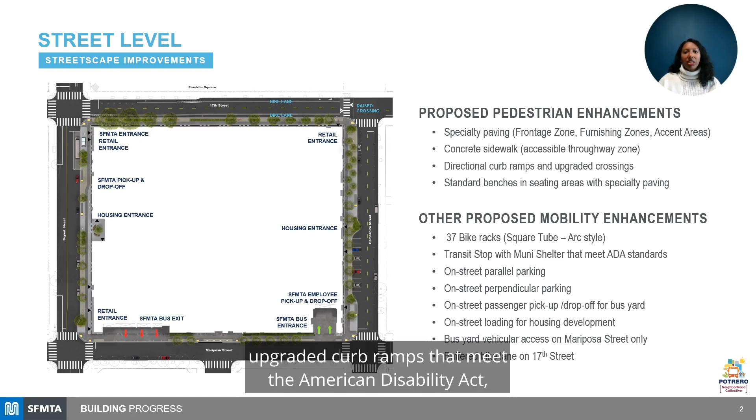To support the reimagined Potrero Yard, the design and construction development team has proposed a number of improvements to enhance both the pedestrian and bicyclist experience. Proposed pedestrian enhancements are designed to create vibrant sidewalks through a mixture of concrete sidewalks and specialty paving, upgraded curb ramps that meet ADA requirements, upgraded crossings, and carefully selected and placed outdoor furniture.

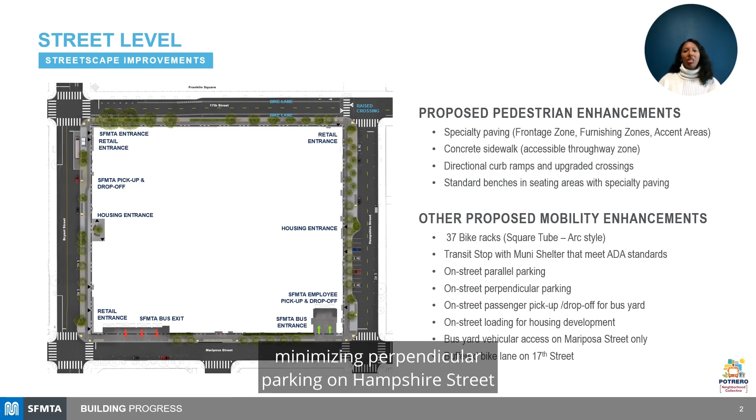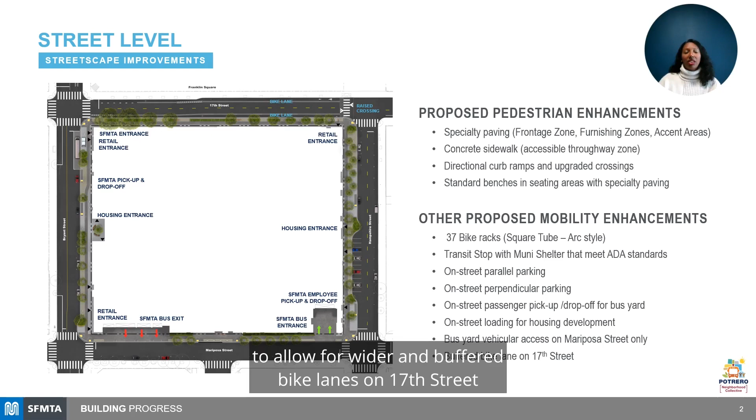Improved mobility is also supported by adding a Muni shelter at the existing stop on Bryant Street near 17th Street, minimizing perpendicular parking on Hampshire Street to support bicycle safety, removing parking on 17th Street to allow for wider and buffered bike lanes on 17th Street in both directions, and creating dedicated spaces for passenger pickup and drop-off for both the bus yard and housing development.

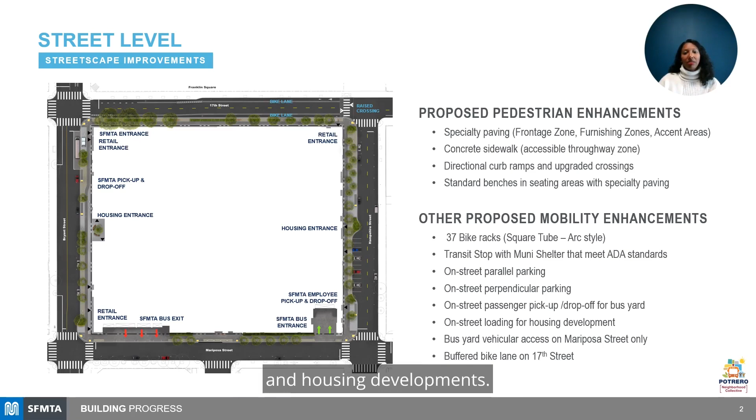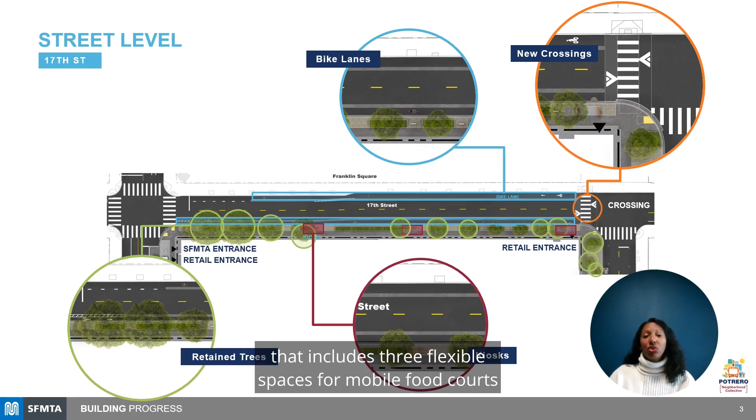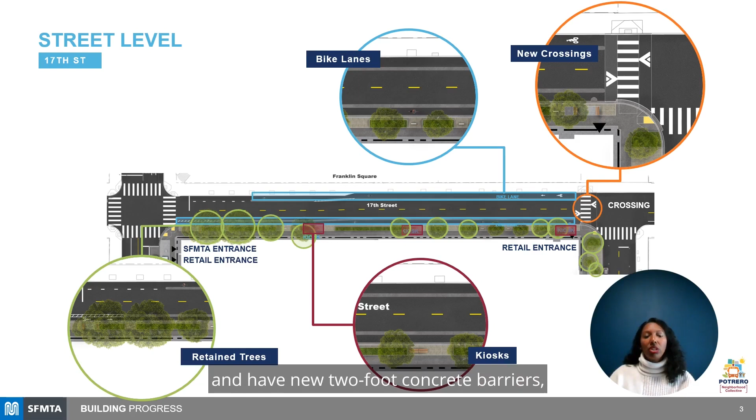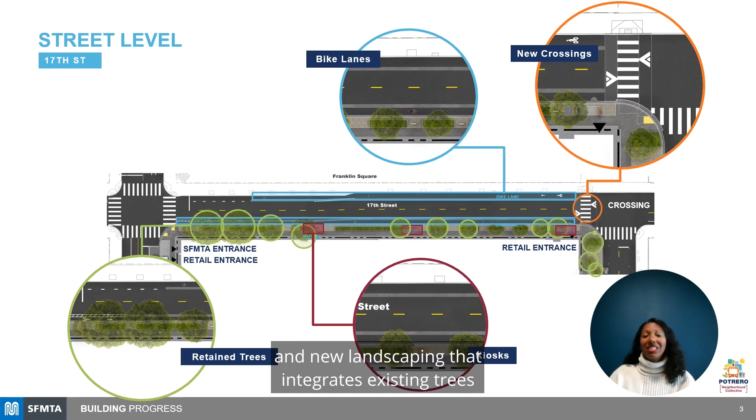To create an inviting environment and connection to Franklin Square, an activated 17th Street has been designed that includes flexible spaces for mobile food courts or kiosks to operate, Class 4 bike lanes that are wider than the existing bike lanes and have new 2-foot concrete barriers, a new crosswalk with beacon lighting at Hampshire Street to support safe crossing, and new landscaping that integrates existing trees with new trees and plantings.

The landscaping plan has a mix of trees, including an anticipated 8 existing Nichols willow-leaved peppermint trees that are along 17th Street, and 3 tree species identified as community favorites during a community survey issued in spring 2023, including the golden medallion tree, strawberry tree, and Princeton Sentry ginkgo tree.

Other trees that moderate water well or are pollinator species will be included, such as the Ray Hartman ceanothus tree, the Little Gem magnolia tree, and the jacaranda. In total, 48 trees are planted around the site at the street level.

The landscape design also includes a number of shrubs, grasses, and perennials, in addition to the trees just presented. The planting palette will include a mix of California native, low water use, and pollinator species. Examples include the dwarf variegated mock orange, mound San Bruno coffeeberry, Asian star jasmine, fortnight lily, daylily, western sword fern, red yucca, Munstead lavender, canyon prince wild rye, lomandra, and rhodocoma.